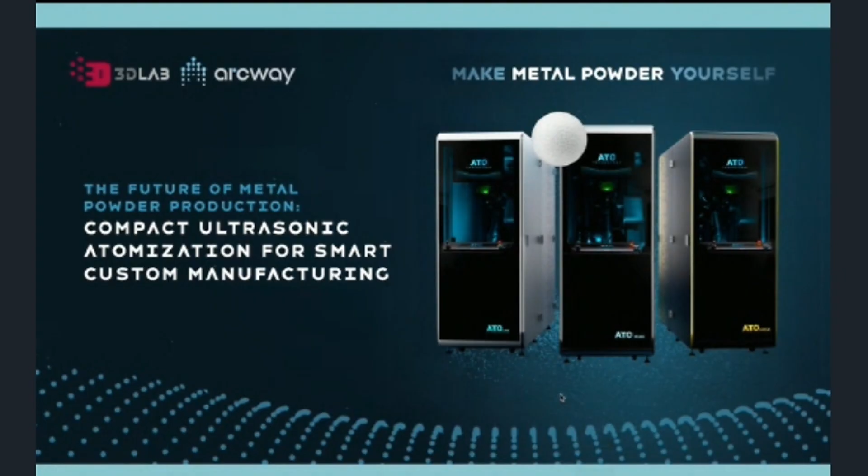We're good, thank you. As I mentioned, I would like to thank Additive Plus and Harry for the introduction. During today's webinar, we would like to show you the capabilities behind our ultrasonic atomization technology. The main topic, as Harry already showed you, is the future of metal powder production: compact ultrasonic atomization for smart custom manufacturing. To be honest, this topic reflects perfectly what we have done in the previous months.

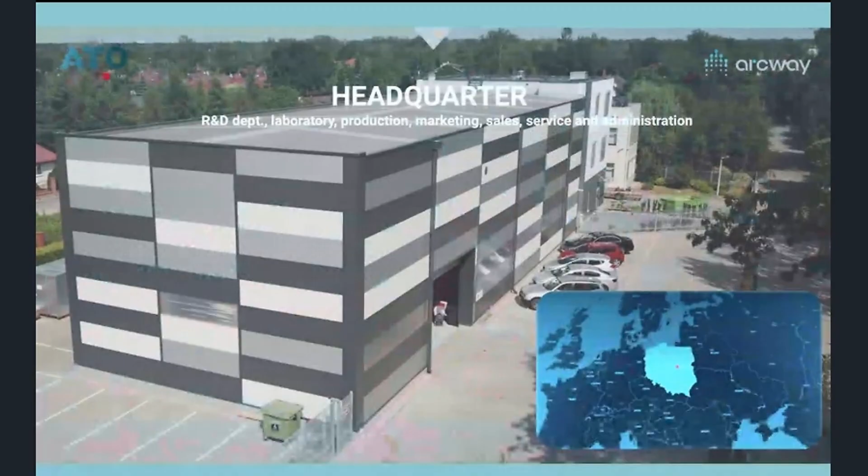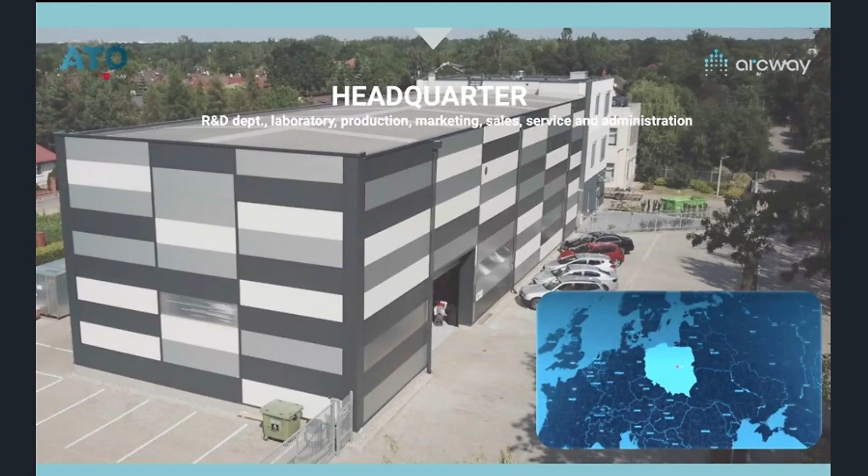I saw the message, okay, right now you can hear me. Great. This topic perfectly reflects what we have done in the previous months. We introduced a completely new line of atomizers, but let's go through it step by step, because first I would like to share briefly information about our company, which is located in Warsaw, the capital of Poland. The whole R&D department and production facility is located in this one building.

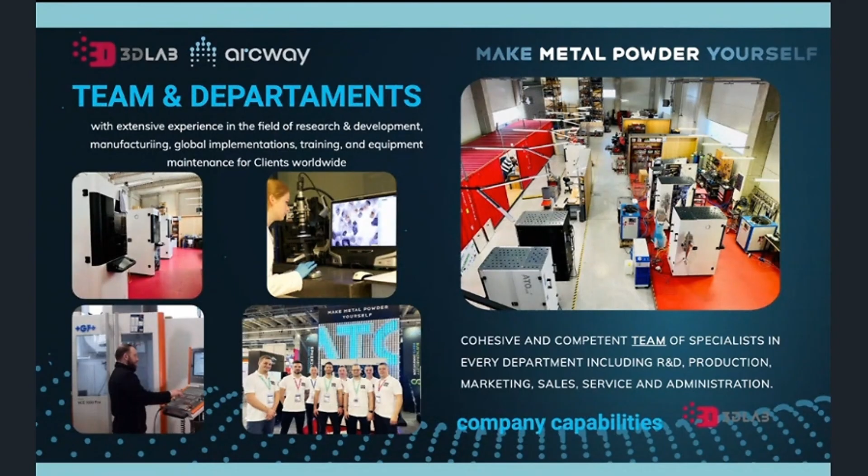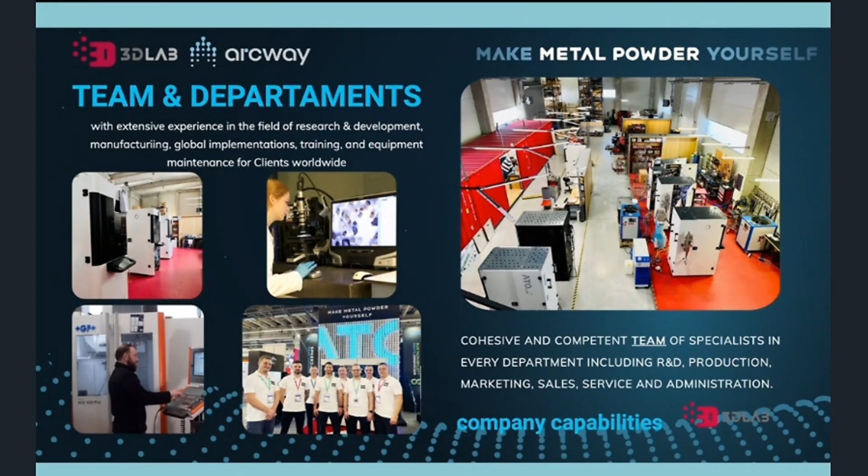It means we are largely self-sufficient in terms of development and production. In this picture, you can see part of our production, our R&D department, and a few members of our crew. It is also an excellent place to invite our guests whenever they need to check the capabilities of our technology live and run atomization trials whenever they need to check their own materials.

But it is also important to mention the background behind our achievements. I believe for all today's participants it's quite important to understand why we developed a new atomization technology. First and foremost, you should know that the 3D Lab company was founded in 2007.

That was completely not profitable for them to order small batches from classic huge gas atomizers. That's why we found a niche for our company. It resulted in an agreement with investors in 2018, and thanks to this, we launched our first device in 2019. Currently we operate under two names: 3D Lab, responsible for manufacturing and development, and Arcway, the main organization responsible for global sales. I am in the role of sales director at Arcway.

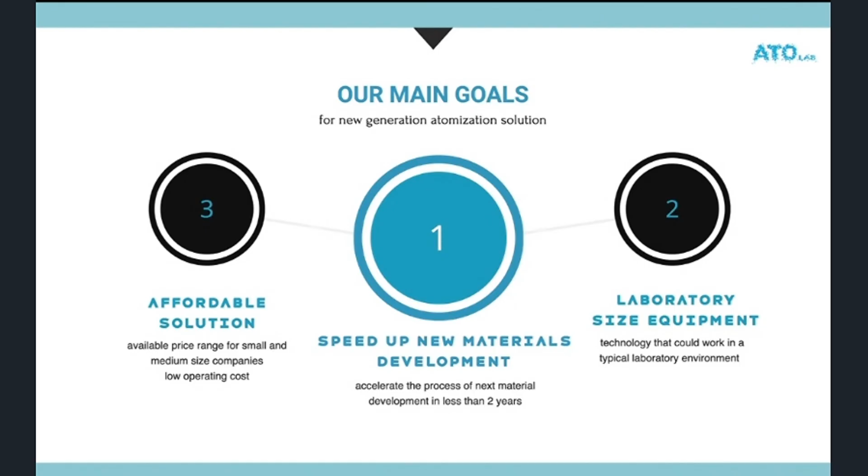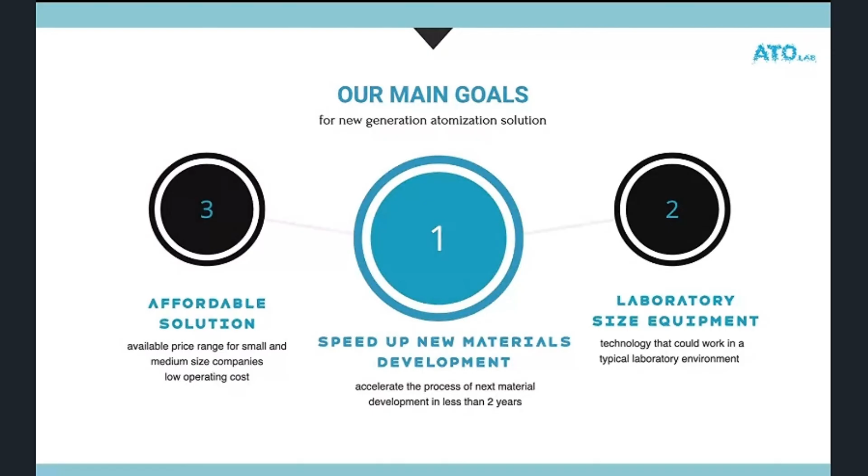Our approach resulted in, as I already told you, installations in many different countries all over the world, and most

of our customers are from very well-known or famous organizations - famous universities, R&D centers, and research centers in big companies.

Let's talk about the solution which can optimize atomization efficiency. As I already told you, this year is particularly important for us because now we can speak about the latest

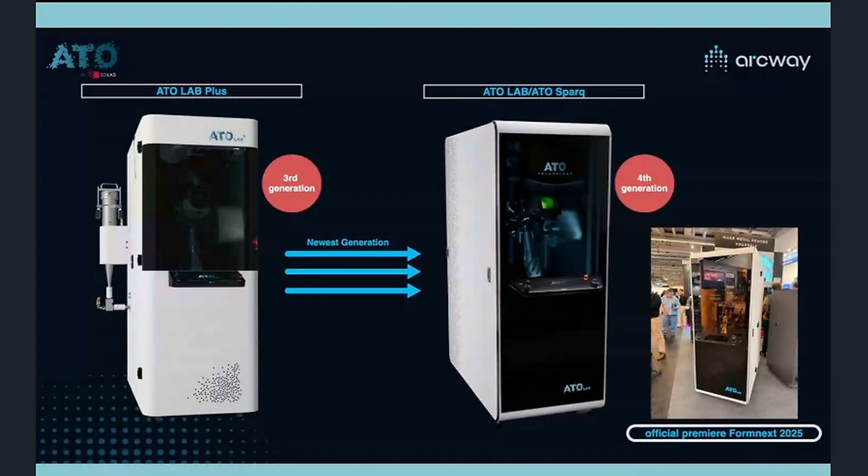innovations. We are right in the middle of the transition from the 3rd generation to the newest one, the 4th generation of our atomizers. We already stopped production of the previous generation, and we announced the premiere of the newest version during the Formnext trade show.

I believe we can start discussing the capabilities behind the atomizer features by showing you this short video.

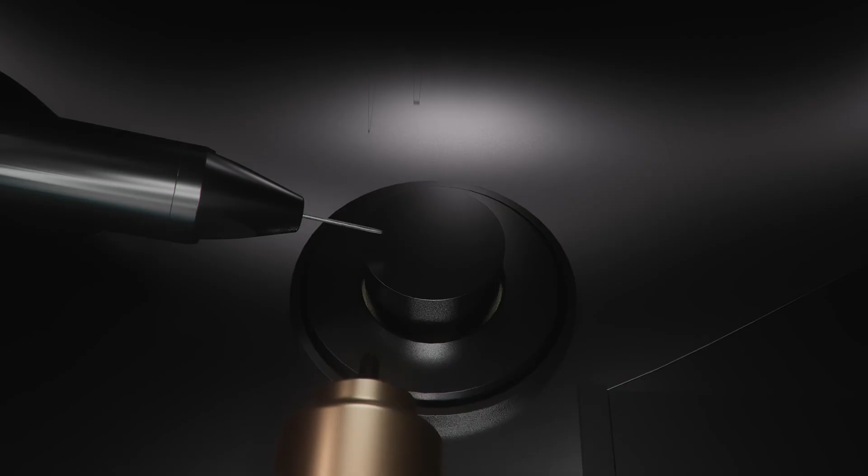I believe not everyone can hear the lecture, so I will try to explain what we can see right now. Right now we can see the automatic torch movement and the wire feeding system.

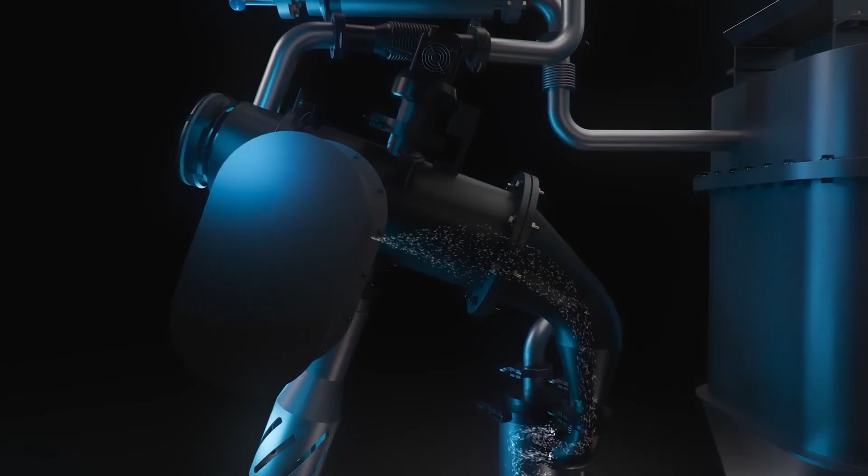Right now you can see the atomized powder, which moves through the process chamber directly to the cyclone, and then all particles smaller than 5 or 10 microns go to the long life filtering system.

This is a very important feature because none of our customers need to change the filtration system, which I will explain a bit later. This filtration system was designed with the German company Herding, and as I mentioned, this is quite

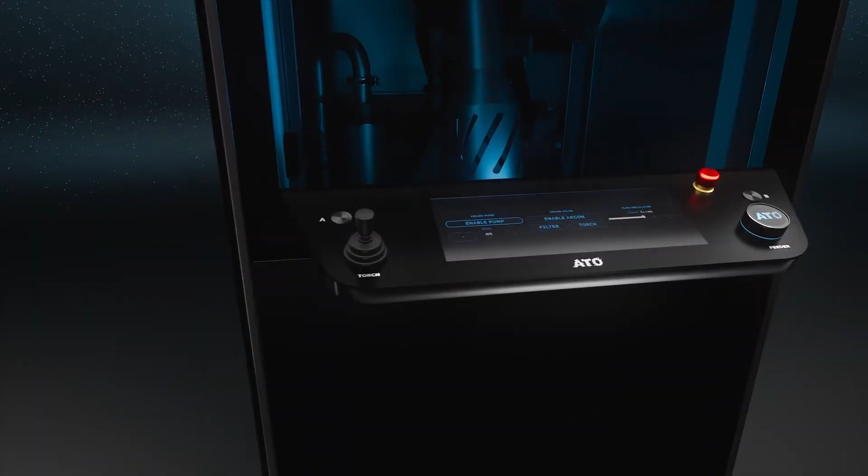an important feature because you don't need to spend additional money on the filtration system. On this additional screen, located in front of the operator's eyes - which is also something new in

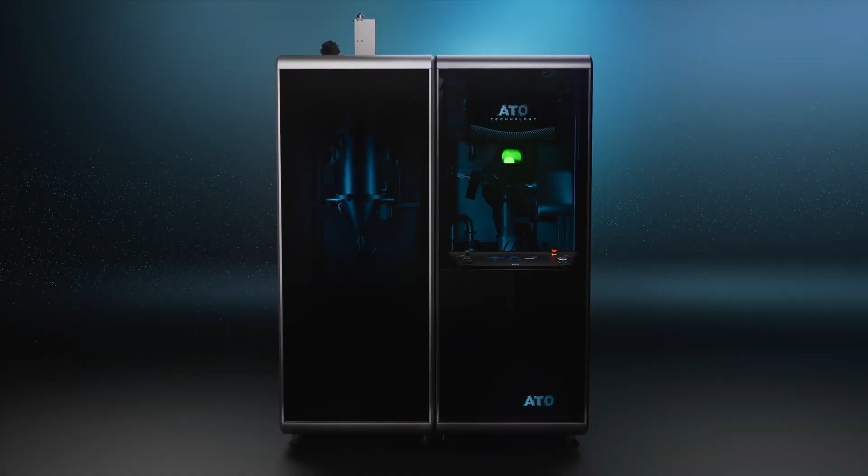the newest generation - we can control all the process data, and we can speed up the atomization process compared, for example, to the previous generation of our atomizers.

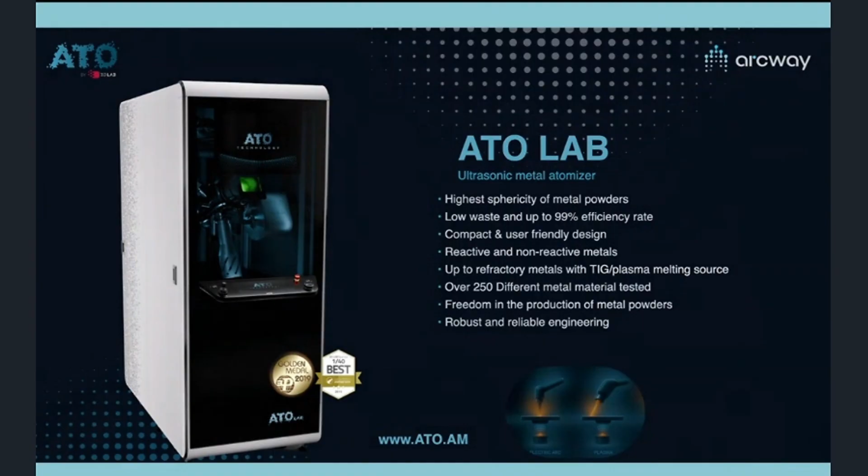Let's talk more about the possibilities behind the new machines. I would like to start with the new ATO Lab.

This machine was completely redesigned in terms of software and hardware. We've added an ultrasonic and multi-frequency generator, which is helping us achieve even better results in terms of

particle size distribution. In that case, the customer can switch between TIG or plasma whenever they need to, for example, to implement an additional module in the form of a plasma melting source.

In that case, we also changed the body a little bit, and inside the machine we now have a coating system which helps us improve the filtration system.

As I told you during the short video, in our case the customers don't need to change the filtration systems at all. During the atomization process, the operator can see on the control panel what the level of

contamination is. This is crucial information for the customer because we are not using standard HEPA filters. This is a HESL filtration system, which is much better compared to the HEPA filtration system.

In that case, you will see the percentage level on your control panel, and you will know when you need to clean the filtration system.

By cleaning the filtration system, I mean 2 processes and 2 clicks of the button. We simply release the argon pressure onto the filtration system, and then we can blow off

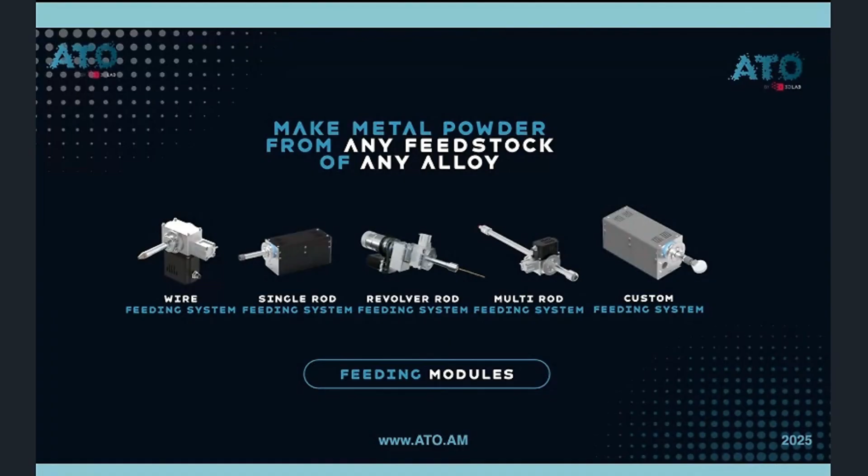Let's talk about the input materials and the feedstock. This is a very important topic for our customers and our technology, because many times we receive requests and questions about the possibilities to work with different input materials. You should know that all our machines are equipped with wire feeding systems, and to be honest, this is one of the easiest options to work with the atomizer. Imagine putting a big spool of wire into the system with a diameter from 0.8 to 2.2 millimeters, and the process can be almost fully automatic.

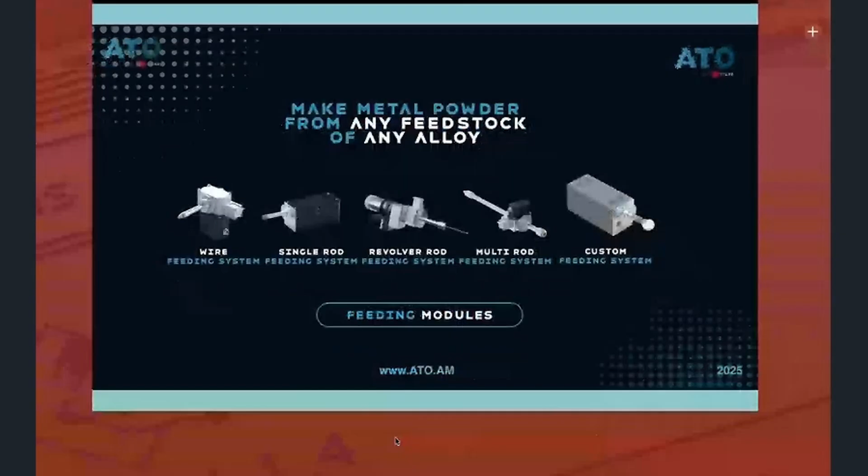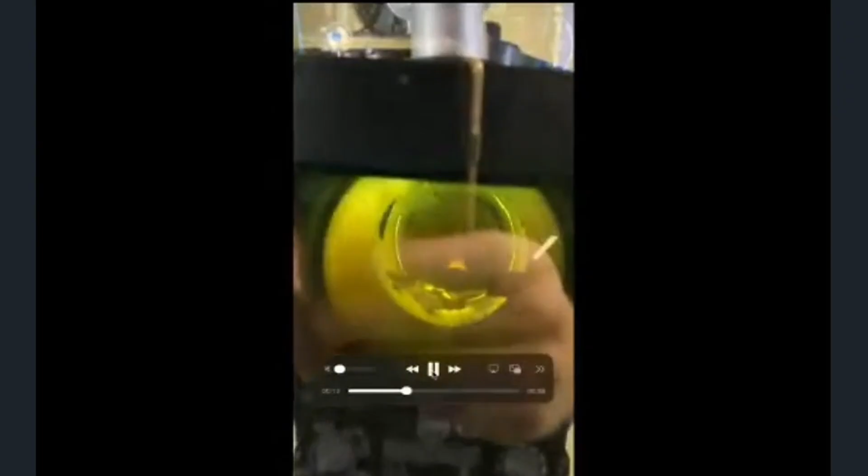To give you proof of this atomization process from wire, I would like to switch to another window and show you, with the previous generation, the atomization process, which is fully automatic, from nitinol wire. In that case, we atomized nitinol wire, as I remember correctly 1.5 millimeter diameter. But what is most important for you right now is the view from the chamber. The process is fully automatic. Moreover, we've implemented automatic torch movement, which can be programmed, and then the operator can go to another room and even control the process from the remote control panel.

To show you how to do this, I will show you another short video.

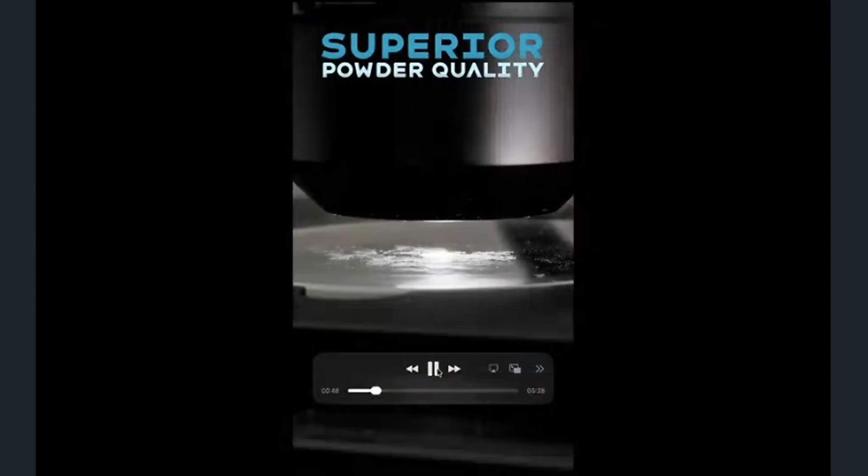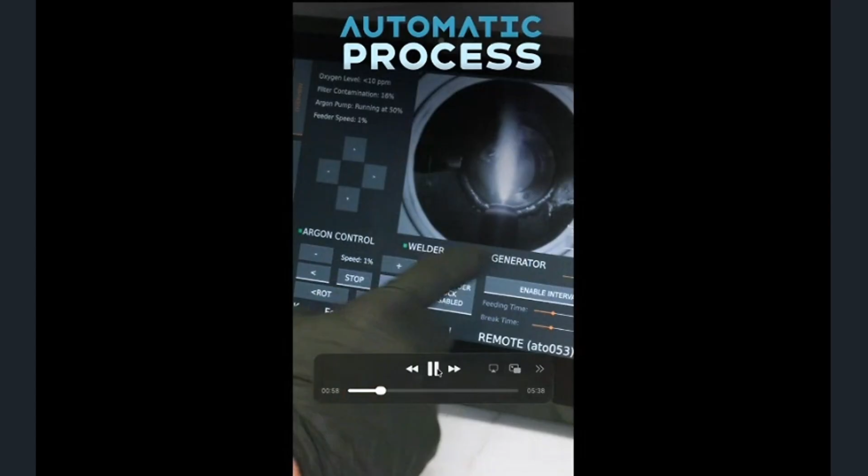As I explained, we can deliver an industry-grade tablet which allows you to work with the machine from a completely different place. And what is most important for our customers, we can even control the installed atomizers all over the world. Of course, we need permission from our customers to connect with the device, but imagine not needing to wait for a technician to resolve problems. In many cases, we can connect with the device and even run the atomization process. The only thing you need to do is put the input material into the process chamber, and our application engineer or technical crew can do the rest.

Let's continue describing the feeding systems. On the screen right now, you can see a few options. The single rod feeding system is the best option for an R&D department, because the wire is not the only option you would like to work with in the future.

Let's imagine you would like to work with pre-alloyed material, maybe you already have a casting unit. In that case, you can cast your own material and work with rods, even bent rods. The single rod feeding system gives you the option to work with rods up to 110 millimeters in length and up to 10 millimeters in diameter. You can even rotate the rod.

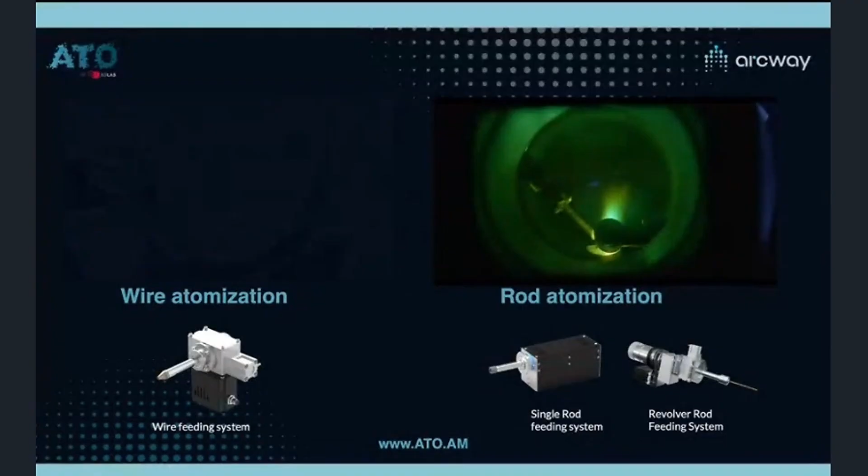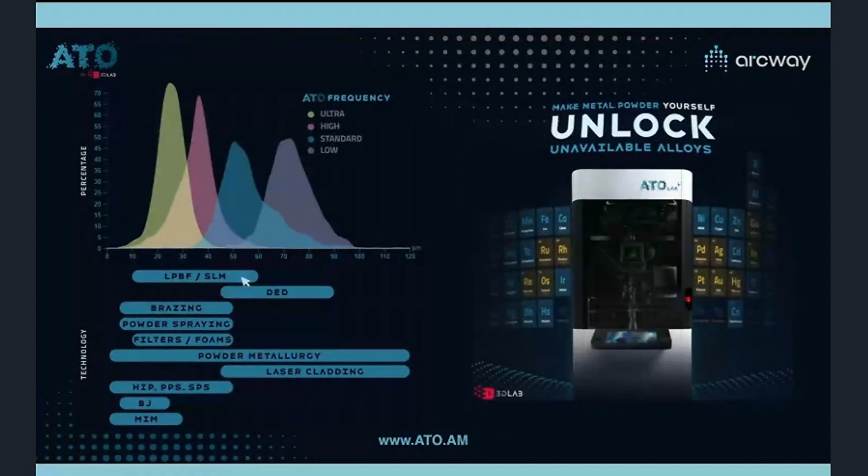What is also very important for our technology is the possibility to work with multiple different particle size distributions. In 2019, once we started with our technology and delivered the first machine, there was only one option.

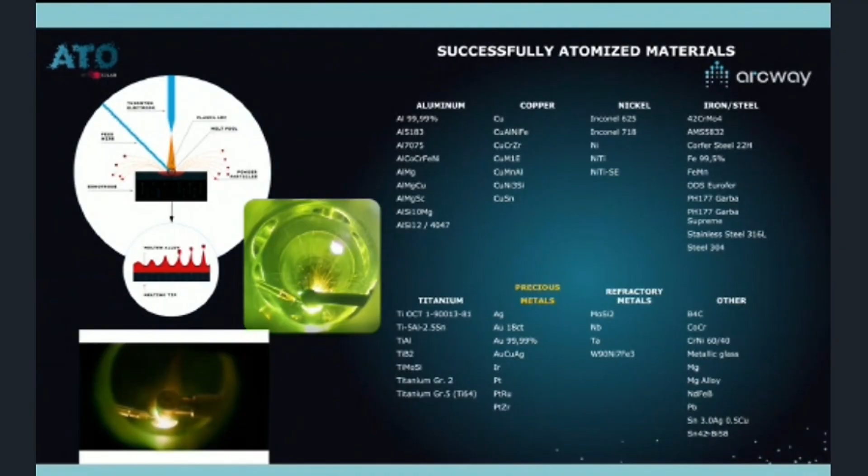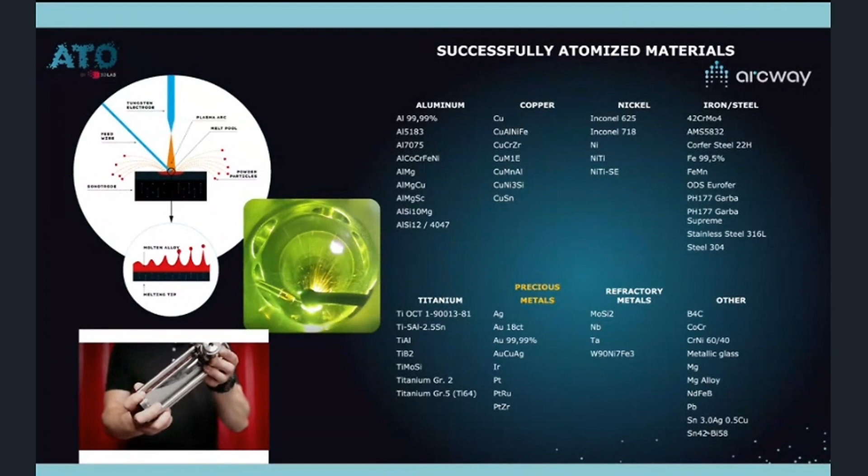This is a picture showing an example of already atomized groups of materials, like aluminum-based alloys, copper-based alloys, and nickel-based alloys. We have already tested more than 400 different materials, and the possibility to switch between different feedstock gives us the option to test more and more new alloys.

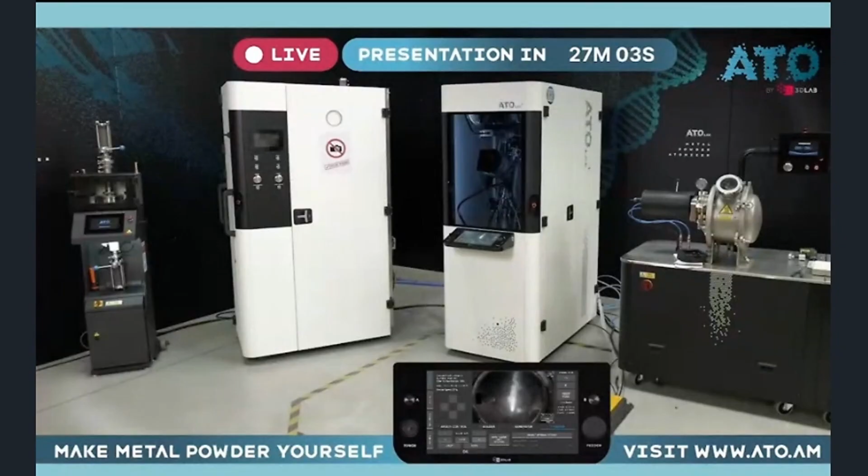Right now I'm showing you a quite interesting time lapse, which is of course sped up for the webinar purposes, but it shows that this atomization process can be almost fully automatic without almost any need for operator control.

It's quite interesting that you can see right now the view of the control panel, which can also be turned on a computer or tablet at a completely different location.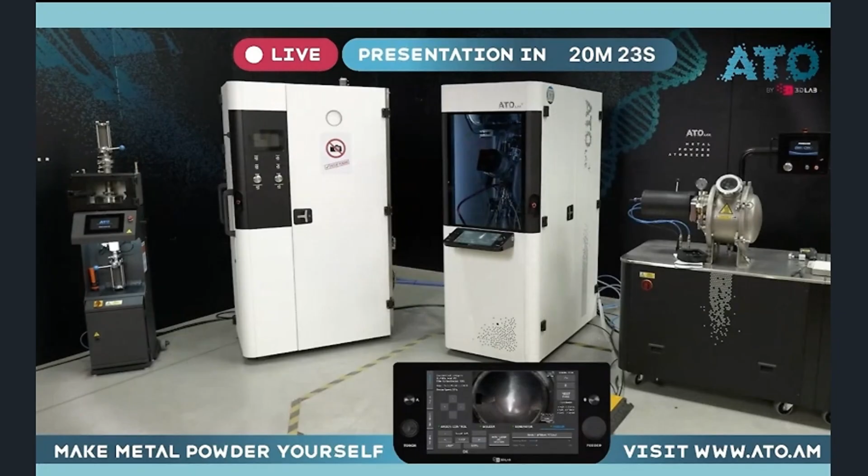Let's focus on another possibility. I already introduced you to several different input materials, like the wire feeding option, rod feeding option, and the possibility to work with custom shape feedstock. But what about the situation when you would like to work with scraps, or maybe a powder?

Sometimes we are receiving requests about how to turn powder into powder. Maybe those customers would like to work with much better quality powder, which is why they are asking us about this possibility.

Three years ago we changed the game, because the induction melting system, a module for the basic machine, for the basic ATO lab or ATO Spark, gives you an option to work with both crucible and rod feeding systems, which you can atomize directly in the ultrasonic field. In that case, the induction melting system works up to 1500 degrees in terms of the melting point for the materials you would like to work with.

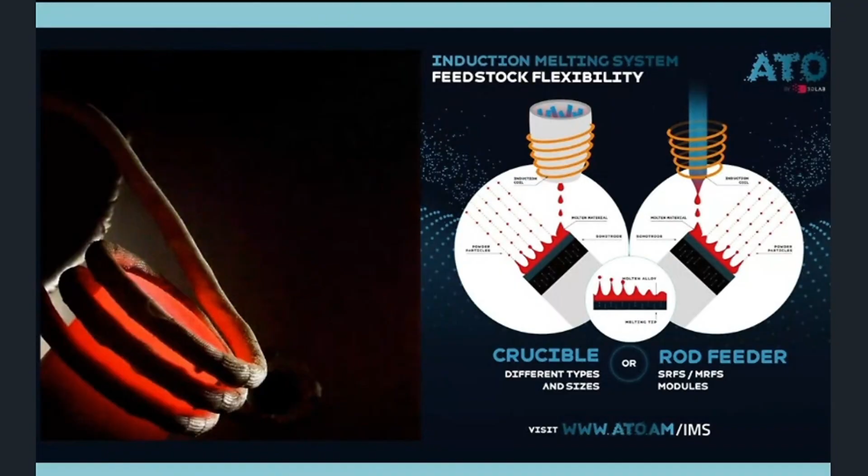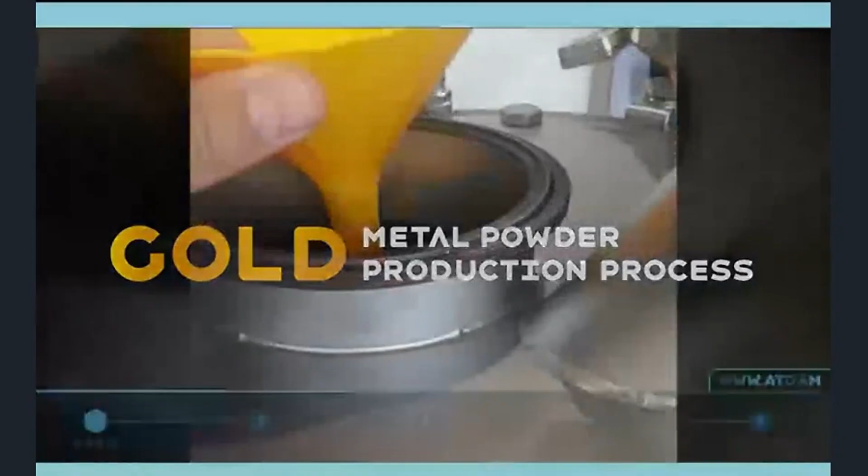To explain how we can work with the induction melting system, I would like to show you 18 karat gold by using our induction melting system.

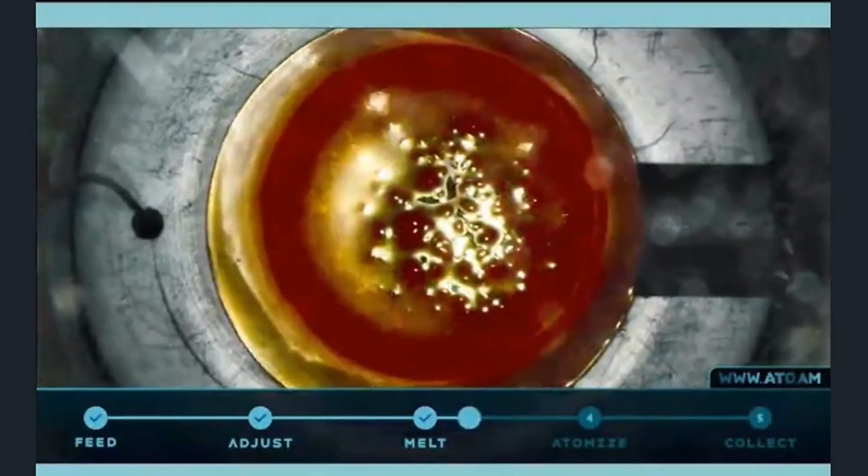Right now you can see the view from the control panel with the most important data like the temperature, the target temperature, the argon flow, and we can also observe the process from the camera view. All crucibles are equipped with thermocouples, so we can check the temperature inside the crucible.

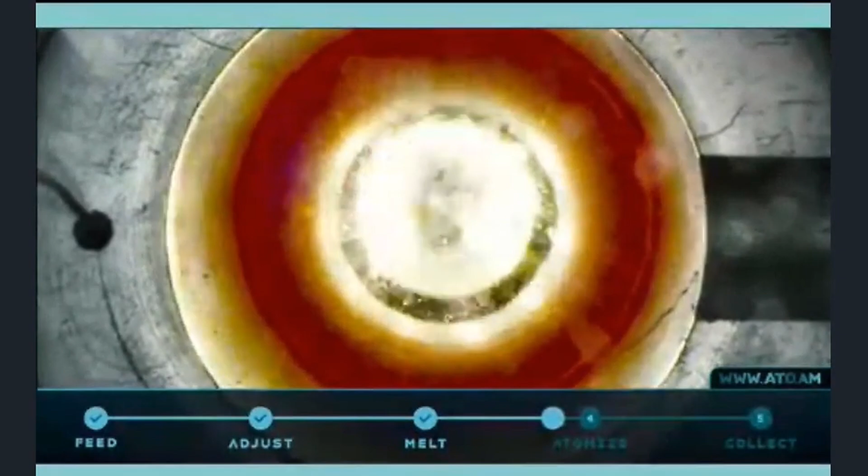And once the material is fully melted inside of the crucible, by one push of the button, we can release the material onto the atomization platform.

As I already told you, whenever you need to work with lower melting point elements, when you need to keep the proper chemical composition, induction melting system always seems to be the perfect choice.

I believe right now it's the perfect moment to hand over to Harry, who can add a few additional points about powder printing and powder analysis.

Great, thank you very much, Marius. So, my screen again, one second. Harry, I believe you can start your section.

So, all right, I would like to complement the presentation from Marius with our field and how we complement fast research and fast development of metal powders using an appropriate additive manufacturing solution. So this is how we do it.

At Additive Plus, we are also manufacturers of 3D printers for metals. These technologies are laser powder bed fusion based, and their main focus is to accelerate the benchmarking or the prototyping with metals, but especially with those metals which have been custom made or produced for new developments or very scarce materials.

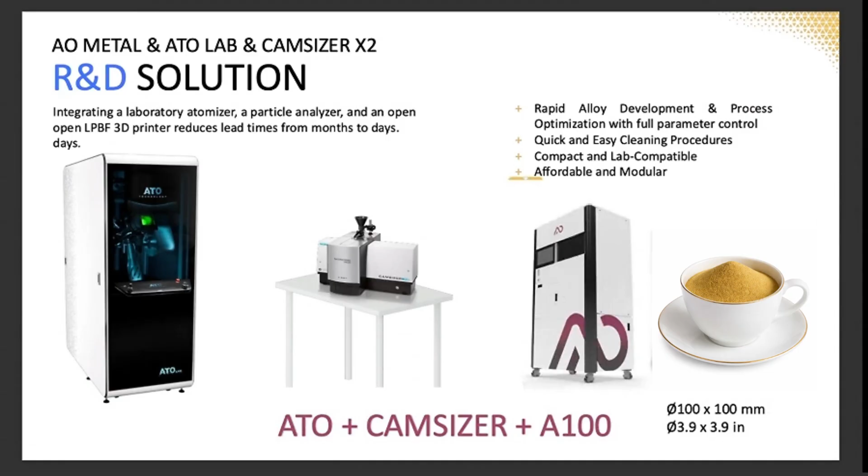So this printer is special for that. I would greatly recommend this for scarce material and also precious metals. The size of this device is 1.9 inches for the build platform diameter, and for the height you can work up to 3.9 inches. The larger equipment from this line is the AO Metal A100.

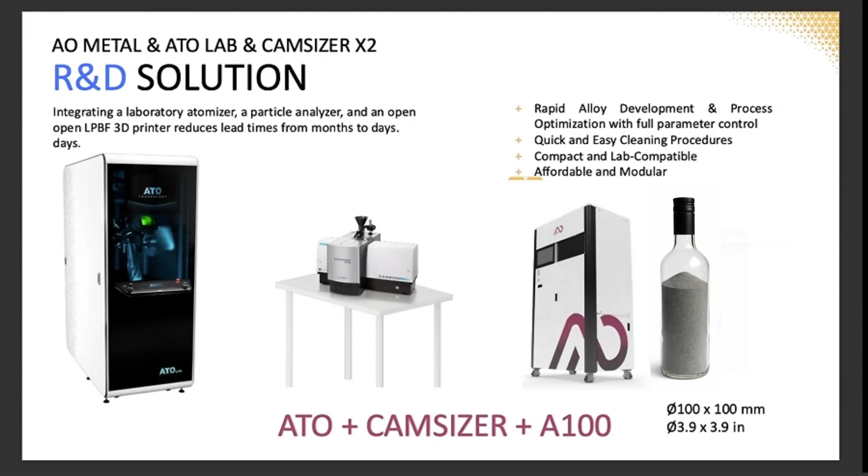So for the larger systems, we also have some very interesting additional features which can enhance the experience for research and development on more difficult materials. For example, one of the additional features we can include in our machines is the high temperature build platform. You're able to reach up to 900 degrees Celsius of build platform temperature, and this will allow the user to work with refractory alloys such as niobium, molybdenum, tantalum, and also tungsten.

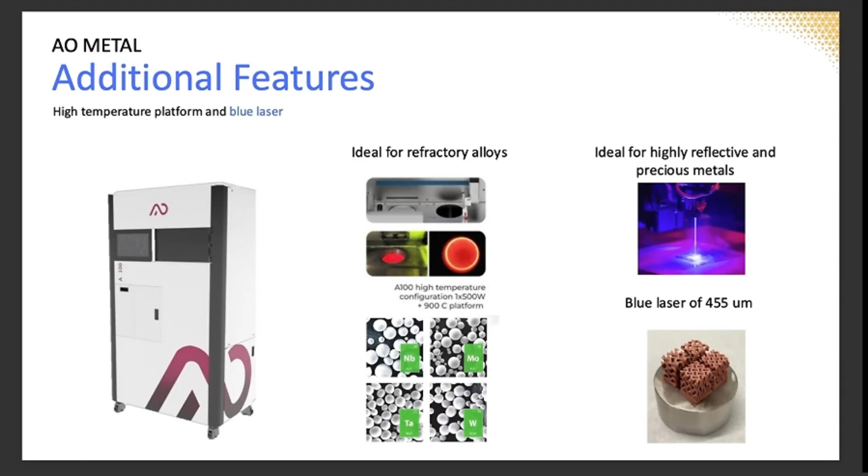Also, to make the spectrum of materials broader, we can include a dual laser configuration, which means you can have a laser of up to 1 kilowatt, 1000 watts infrared laser, and complement your configuration with a blue laser of 455 nanometer wavelength. This will allow you to easily work with precious metals such as gold, platinum, and also challenging materials such as copper and very reflective and precious metals.

So this said, I would like to show you how the workflow for fast R&D works and how is our vision for this.

In this workflow, we consider a metal feedstock. This could be of any shape, as Marius has already shared. We can work with, for example, rods and wire, and we can also prepare the feedstock using a casting furnace. After this, we atomize the powder, sieve the powder to prepare it, then do quality assurance, and after this the powder is ready for 3D printing.

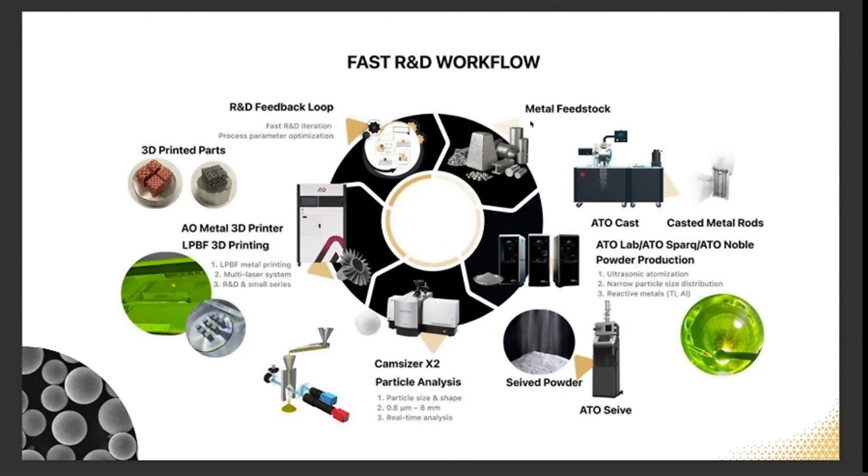If the material is super valuable, we would sometimes like to reuse this material, or be able to reuse the scraps or the support generated during 3D printing. So this cycle repeats, and we have a closed workflow for the development of this additive process and the production of a novel metal powder material.

So this is what I wanted to share very briefly, since this presentation is not focusing on 3D printing. So I give the word again to my colleague Marius to continue with this explanation about metal atomization. Thank you, Harry.

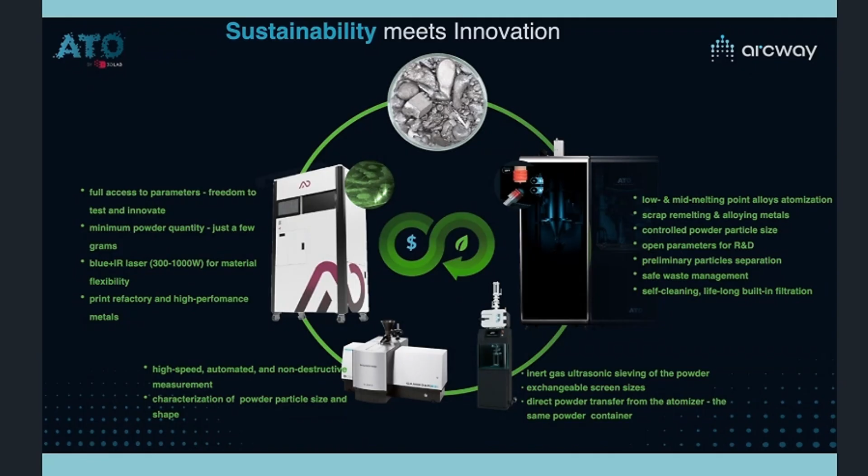Whenever you need to work with standard shape input materials like wires or scraps, this is the scenario you can see right now. But let's imagine the situation when you would like to work with scraps, but at the same time the melting point of your input material exceeds the possibilities of the induction melting system, which, to remind you, is 1500 degrees for the induction melting system.

In that case, we have another solution. This is ATO Cast, an induction casting furnace, which is a completely self-sufficient casting unit with a melting point up to 3000 degrees. This unit is equipped with a vacuum pump, a chiller, and all necessary equipment, which allows you to prepare the feedstock from irregular shape input materials, even up to 3000 degrees.

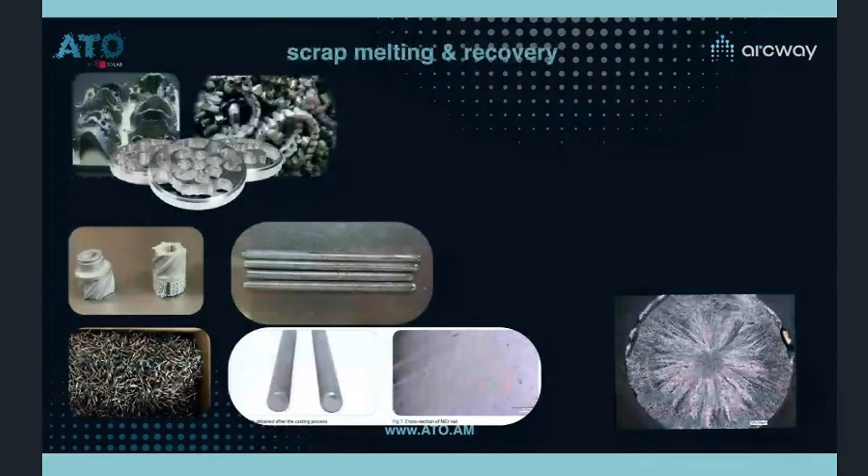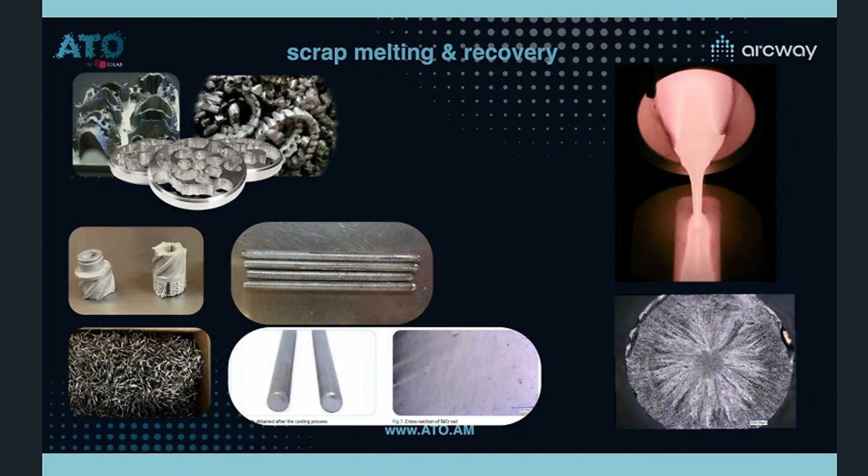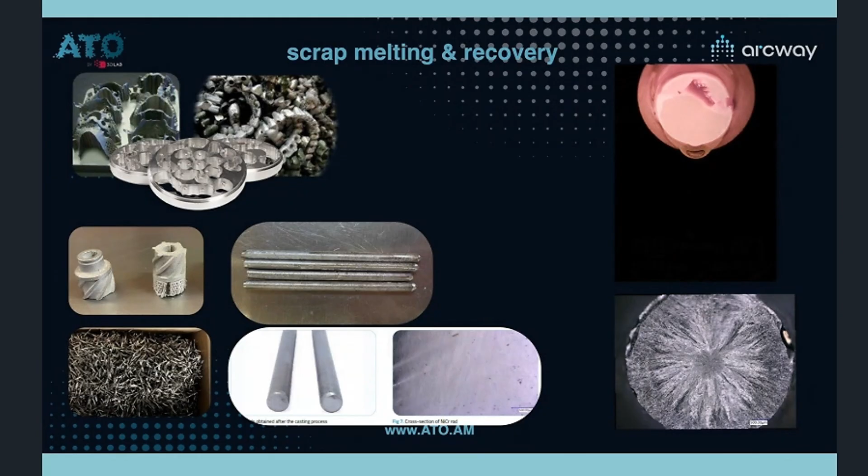With that solution, you can prepare perfectly fitted feedstock for the rod feeding system, for example. You can work with failed printouts, scraps, or cut some parts. Whenever you would like to fit something into the crucible, with two sizes - 75 cubic centimeters or 150 - you can put those parts into the crucible, and by simple tilting of the melted material, you can prepare your own feedstock.

In that case, you will achieve this cycle: with the ATO Cast, you will prepare the input material. Then, without needing to work with the induction melting system module, you will simply atomize the rods created with the ATO Cast using the basic ATO Lab or ATO Sparq. And then the process is the same: sieving, analyzing, printing, or different processes like powder spraying.

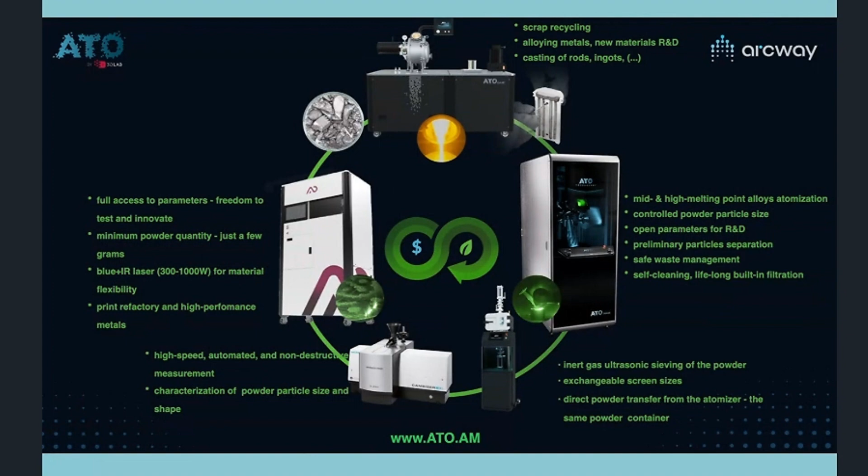I am showing you this loop to give you the information that we have multiple different answers for multiple different scenarios. But let's say a few words about the quality of metal powders. Based on our experience, I can tell you that we already tested around 400 different materials with melting points up to 3400 degrees.

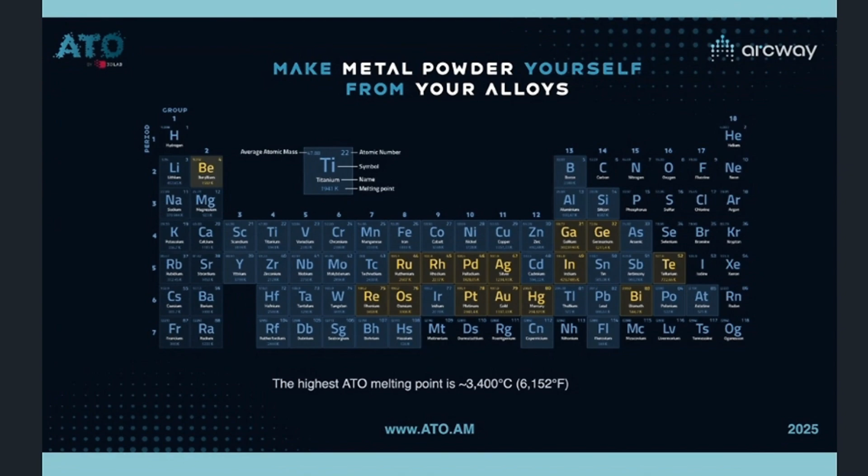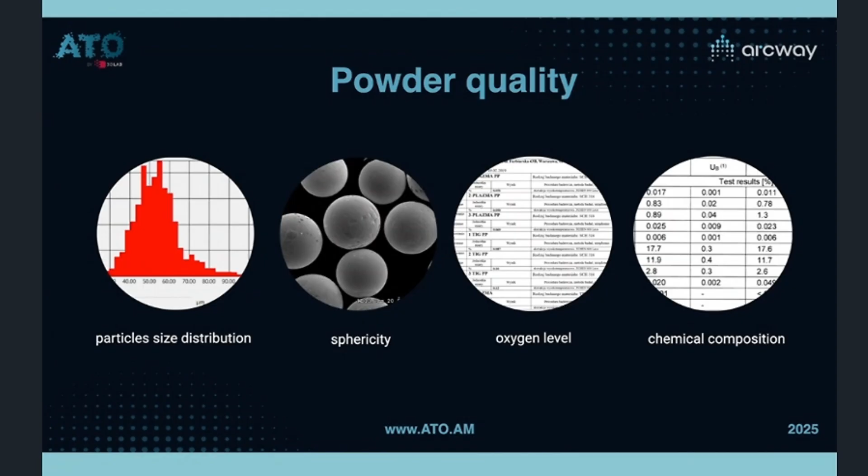The only need from our side is to know the customer needs and the melting points of their alloys. Then we can choose the proper path to atomize their material. In the past, we found out that particle size distribution, sphericity, oxygen level, and the chemical composition are one of the most important factors for our customers.

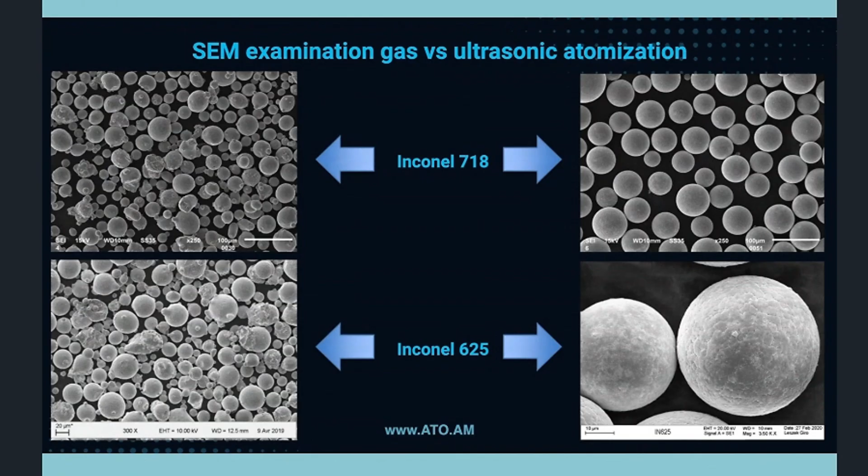That's why we need to be sure that we can please even demanding customers. Right now, I'm showing you a simple comparison between the classical gas atomizer powder on the left in comparison to the ultrasonic atomized powder on the right-hand side. Those are two different examples, Inconel 718 and Inconel 625. But to be honest, in terms of the sphericity or the flowability, you will achieve the same results for almost all powders. In that case, I'm showing you another few examples, like copper, Haynes 282, or even tantalum.

I would like to remind you and underline that whenever you are working with the induction melting system, by the nature of the process, you will achieve, in most cases, such shiny powder as I'm showing you on the left corner. In that case, this is a copper example.

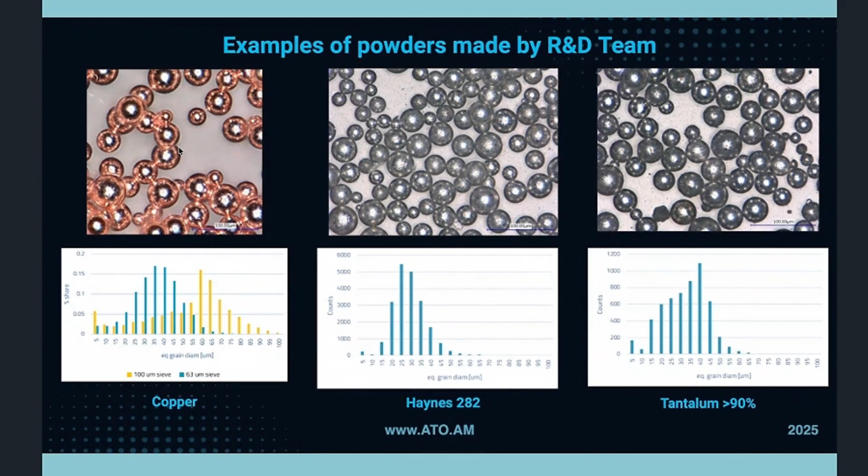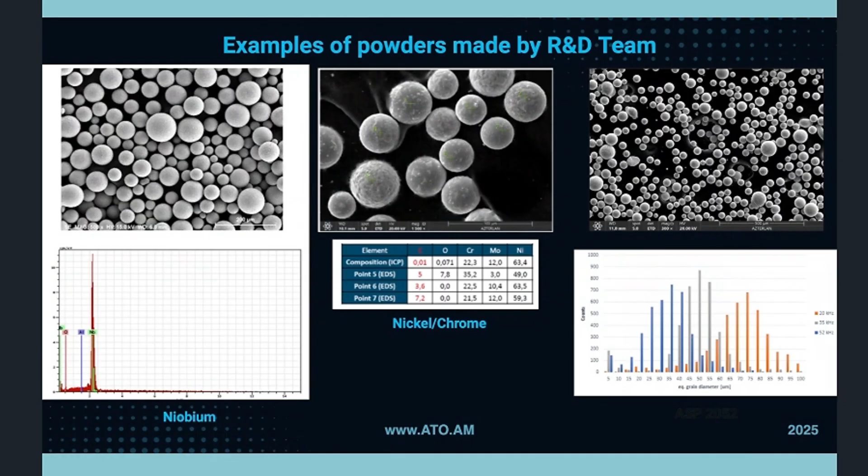More and more requests we are receiving from customers who would like to test the application related to niobium. Right now, you can see a few SEM examinations of the niobium powders and also a histogram graph with 3 different results in terms of the particle size distribution with the 35 kilohertz, 20 kilohertz, and 52 kilohertz examples. Niobium is particularly important for us nowadays because, as I mentioned, more and more customers are asking us about that.

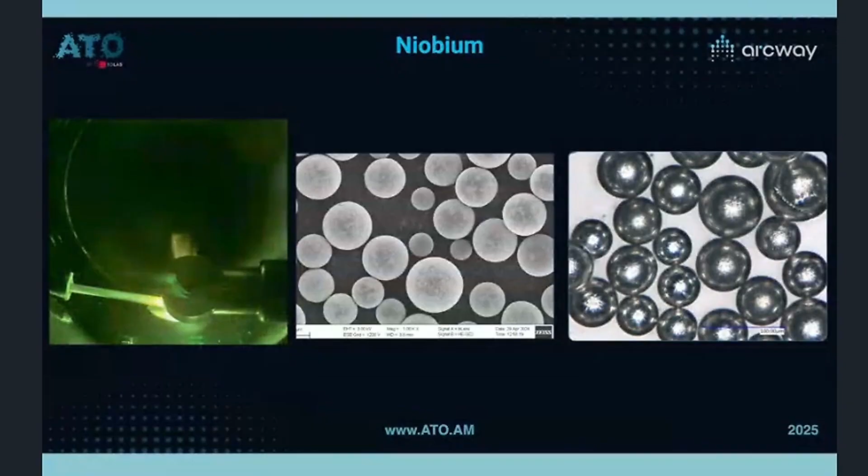In that case, we also achieved great results. And you can also see a short video presenting the atomization process, the continuous atomization process of a long niobium rod, as I remember correctly, almost 1 meter 20 centimeters.

Copper is another example of perfectly fitted material for the induction melting system. Low melting point is perfect for the induction melting system. In that case, we can also increase the efficiency of the atomization process and the throughput in comparison to, for example, the classic rod atomization process in the basic module.

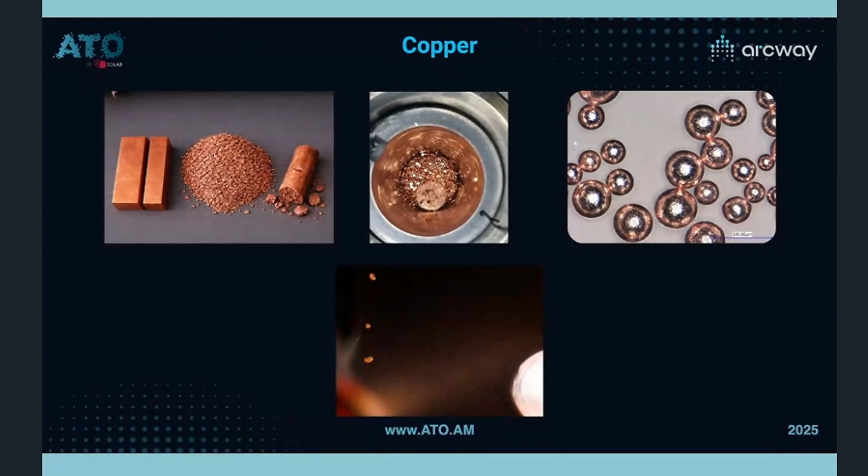Please imagine the situation that one of our customers bought a basic module a few years ago, a standard module with an option to work with wire and rods. After some time, he started working with magnesium. This is, as you already know, a highly reactive material.

But we are not creating a combustion atmosphere at all in our process chamber. The whole path from the atomization platform to the collecting container is under argon atmosphere. We also tested in external accredited laboratories, and we are sure that you can work with even highly reactive materials.

In the case of this customer, they started asking us about the possibility of creating magnesium powder with a standard option, I mean TIG. And this is a perfect example when TIG or even plasma will not be suitable for low melting point materials, or at least it will be much harder to achieve a proper result without the evaporation.

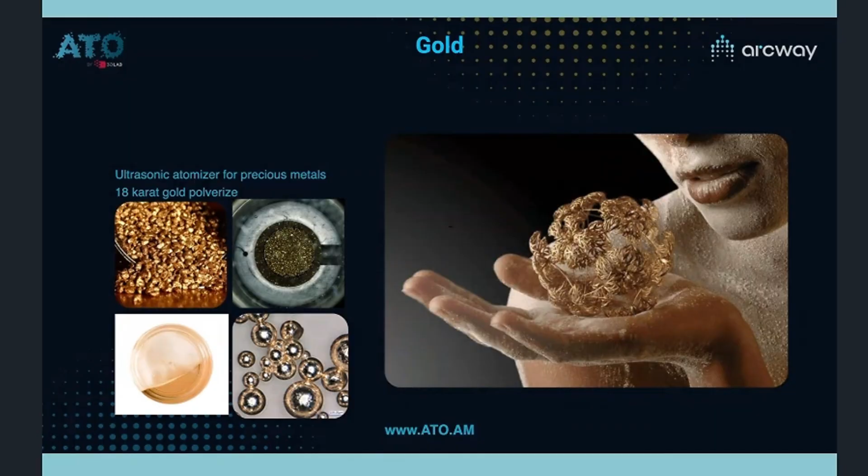We've done the same with gold. We found out that precious materials are perfectly fitted for the induction melting system. We already tried several types of gold, also platinum and silver. And we have also in our portfolio a dedicated version of our atomizer, called Atonoble. But because of the limited time of this webinar, we are not showing you and we are not focusing on precious materials during this webinar.

It's worth mentioning also the auxiliary equipment. The auxiliary equipment is also very important to the proper workflow, because what do you do with the atomized powder, especially when you need to work with reactive materials. That's why we've prepared our version of the ultrasonic sieving system, which is fully compatible with ATO atomizers. By this compatibility, I mean, for example, the powder container.

Then you can take this powder to the sieving station, turn on the inert atmosphere, and sieve the powder even under inert atmosphere. This ATO sieve also acts like a classifier, because inside the chamber we use not one but two meshes. The desired powder goes to the collecting container, but you also get two different particle size distributions on the two meshes, depending on your needs.

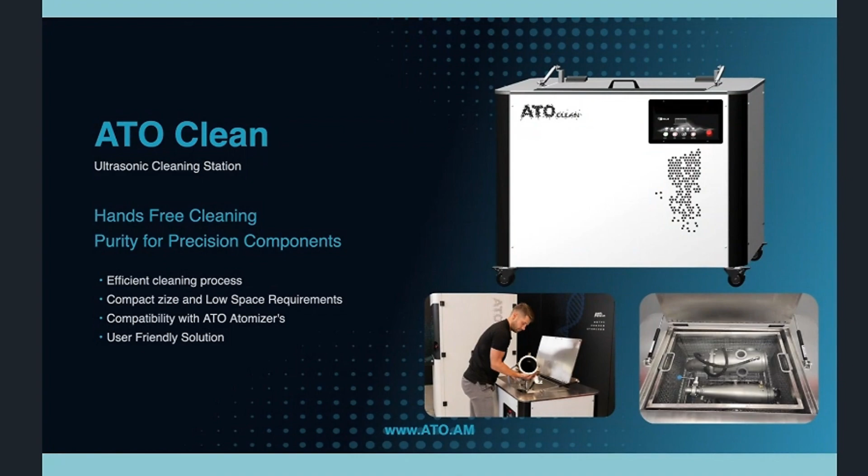In our case, thanks to the modular equipment inside our atomizers, you can simply unmount the most important parts responsible for powder transportation and put them into the ultrasonic cleaner at once. Within 1.5 hours you can clean the system, then mount the parts again - maybe another 15 minutes. Within 2 hours your ATO will be fully prepared for a completely new process, without any toweling, without diving into the process chamber and cleaning by your own hands. You can achieve great cleanliness, almost fully automatically.

Today we have presented the possibilities behind ultrasonic technology. We also showed some examples of application, and introduced customers who place their trust in us.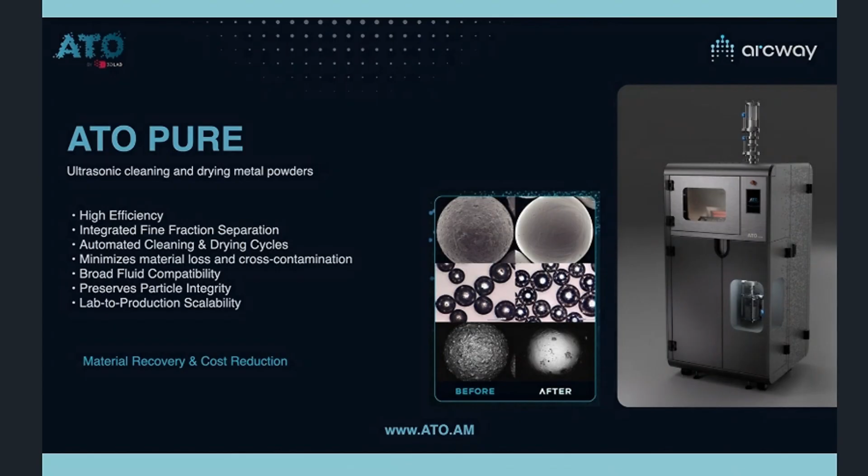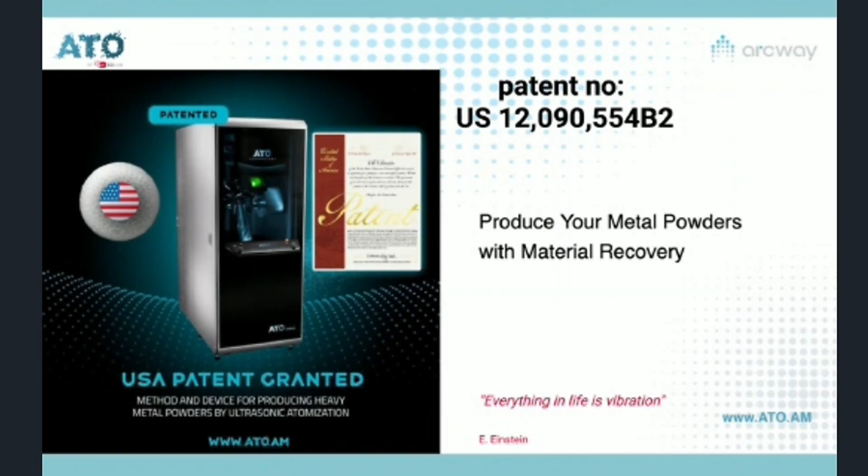I believe it's worth mentioning that we focus not only on technological development, but also on protecting our intellectual property through patent law. We have a dedicated team which handles these matters, and the best example is the patent granted for the whole ultrasonic atomization process in the United States. We hold similar patents in China, Korea, and Japan. We have multiple different smaller and bigger patents in different countries, and of course we are still fighting to achieve more great results in different countries.

I hope the materials and presentation have been clear and easy to follow. At the same time, I'm aware it's quite hard to share all the deep details during a short webinar. That's why I would like to encourage you to contact our partner Additive Plus, especially participants from the United States, to arrange a one-on-one meeting to discuss more details about our technology, because I'm sure they can share much more technological information and success stories, and help you make the proper choice. Thank you for this presentation, and I believe we can start a 15-minute Q&A session.

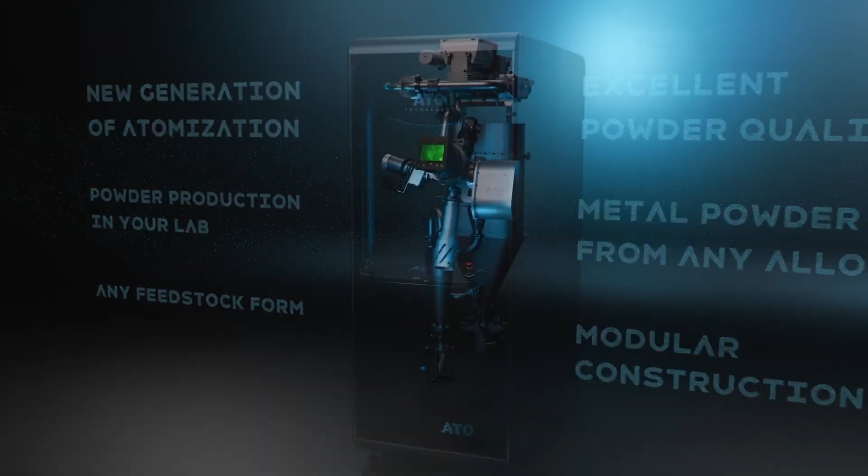Yes, so we have some questions coming in. One of the participants is asking about inert gases used in the process and in what quantities - I believe it concerns the atomization process.

Thank you for the question, this is quite important. Our recommendation is to use argon gas as a shielding gas, specifically argon gas 5.0. In terms of consumption, it's between 15 to 20 liters per minute, and we also use a recirculation system inside our system, which means we can consume less argon gas.

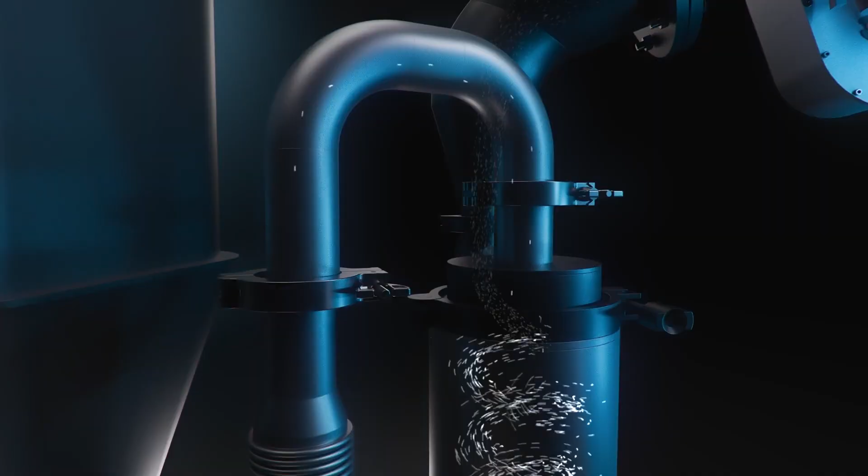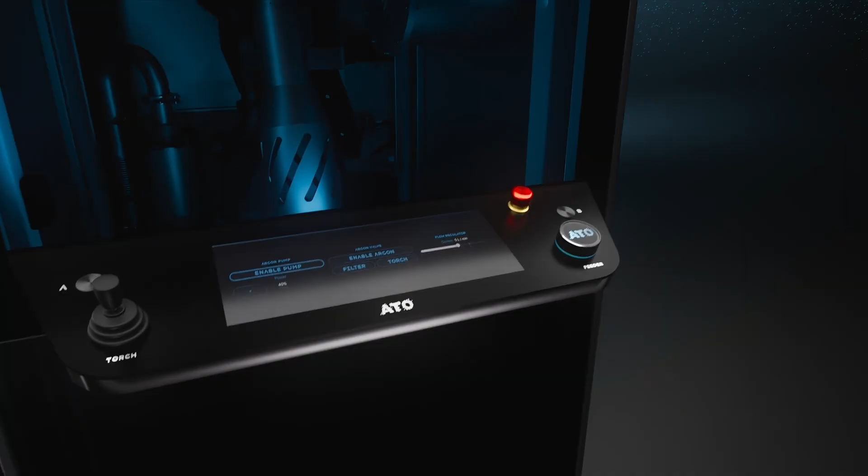Is there a vacuum to be maintained during the atomization process? We are using a vacuum pump to prepare the inert atmosphere much more quickly. Thanks to the vacuum pump, we can prepare the inert atmosphere within about 10 minutes, and during the atomization process, we can achieve an oxygen level below 10 ppm.

What is the shelf life of materials atomized using this technology? It's quite a complex question, like storing the material after atomization. It depends, because there are different ways of storing the powders.

In most cases, our customers use the powder which is atomized on our units daily, so they are not storing the powder too long. But whenever you use a sealed container, which we add to our atomizers, there is no oxygen inside the container. That's why the shelf time can be long. I know 'long' is a general answer, but since there is no oxygen inside the container, the powder will be dry and without additional oxidation.

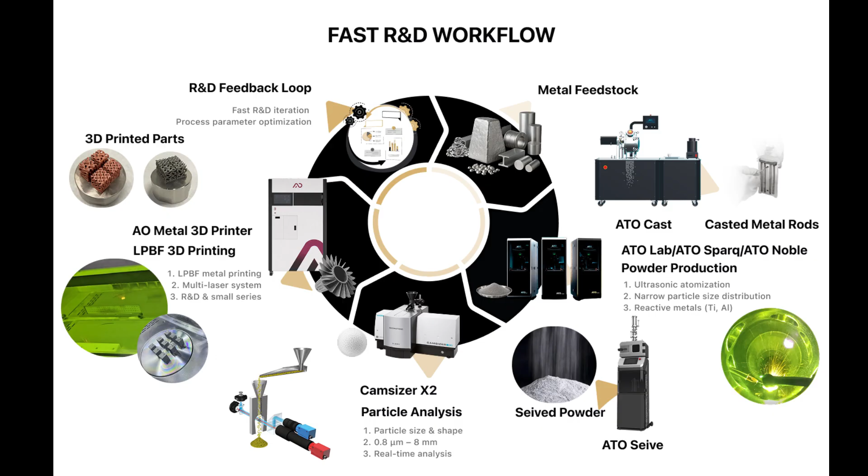Are there any new modules coming, and can the machine be upgraded in the future? Yes, we just announced a few new modules at the Formnext trade show last November, mainly the new ATO Lab, the new ATO Sparq, a completely new induction melting system, and the ATO Pure shown today, which increases powder quality. We're also thinking about new modules, but all customers who purchased machines in the past can order upcoming new units because all our machines can be retrofitted.

One question regarding change of material: how can we keep the purity between atomizations? I will answer with the historical background.

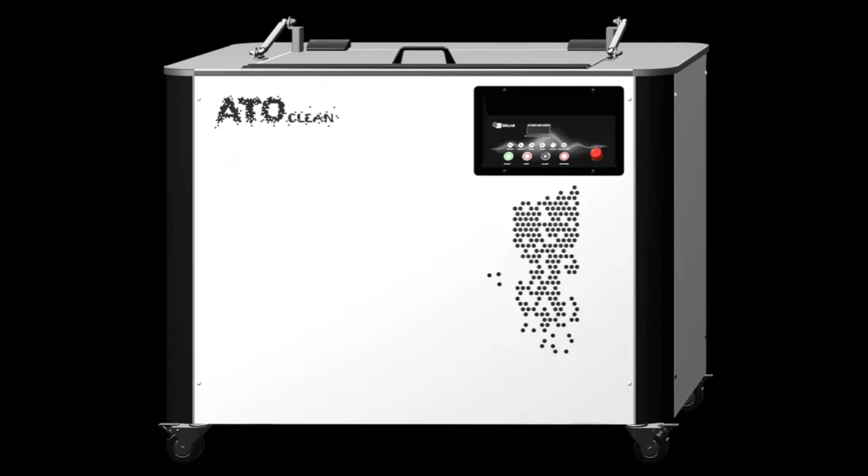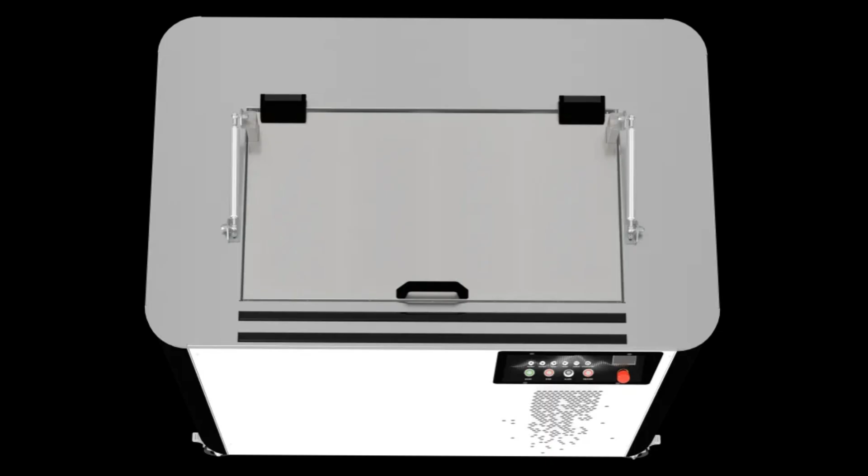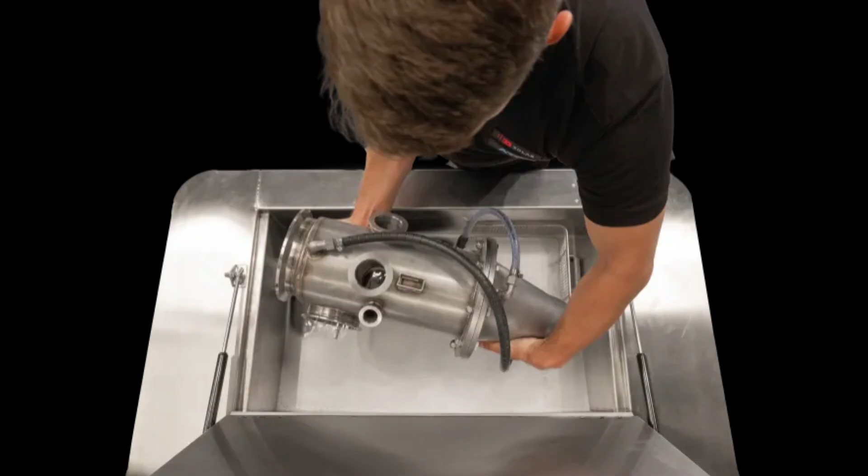I showed you the ATO Clean, the ultrasonic cleaning system. This isn't rocket science, it's made by us, but in previous years we found that commercially available ultrasonic cleaners were not feasible for our technology, because we found impurities after cleaning and still found cross-contamination. That's why we became quite knowledgeable about ultrasonic technology.

We decided to develop our own ultrasonic cleaning station, big enough to fit all internal components like the process chamber, the cyclone, and the collecting container at once. We can be sure we achieve perfect results in terms of purity between processes, since this is our daily routine. All our customers for the past two years have been receiving the ATO Clean, and they report no troubles with cleaning. Nowadays we're sure this system makes it much easier to maintain cleanliness between atomization processes.